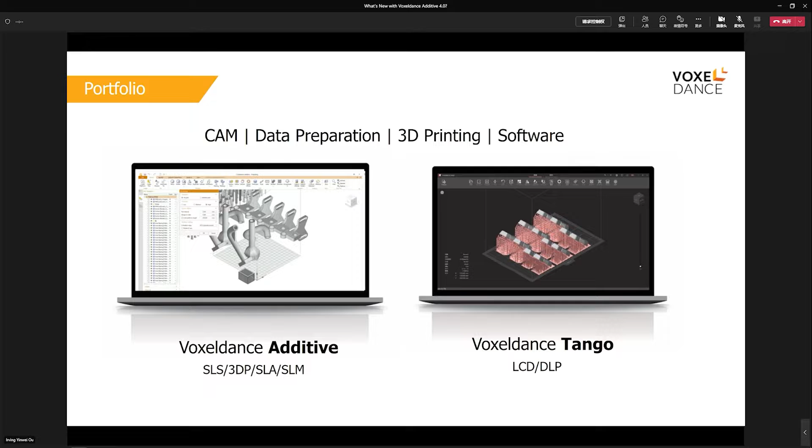They both are data preparation software. Someone may call it CAM or slicer. I understand lots of our attendees today are experts in this industry, but still a little bit of explanation on the concept of CAM: the CAM acts as a bridge between the files of 3D design and the actual printer.

So you cannot simply take an STL file to the printer and immediately print it out. It requires a series of editing beforehand to the original file until it can be 3D printed. This is what our software does.

A professional software can influence the final print in terms of success rate, material consumption, printing quality, whether it's easy to post-process or not. There are only so many options on the market, including Voxeldance and maybe one or two others. You know their names, right?

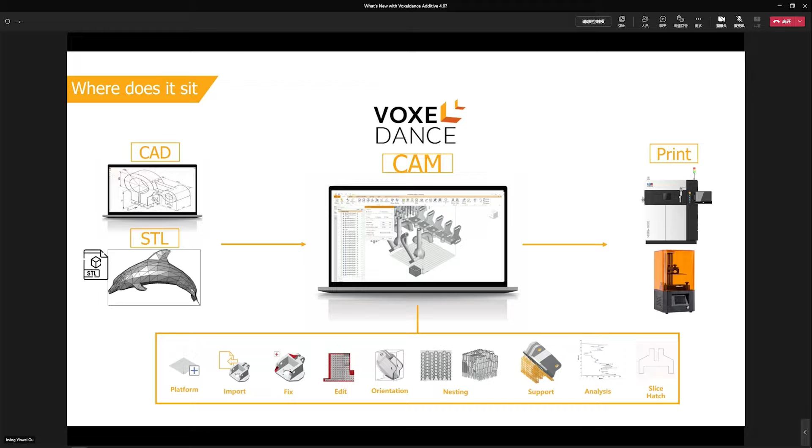And I'm glad we seem to be doing great so far in getting rapid growth of the market share year over year. But again, this is what our product does: to prepare the data of oftentimes complicated and challenging models so it becomes ready for printing.

Now, here in this slide is an overview of the workflow, or the collections of functions available on the Voxeldance Additive: create platform, import STL or CAD file, model fixing, editing, orientation and nesting, and of course support generation, either automatically or manually, or mix and matching them, and lastly, analyze the model and slice it.

We also have an option which the OEM manufacturers might be very interested in, the hatching function. This is an optional module. We call it BP, the build processor, that can be purchased and integrated into the Voxeldance Additive. It basically prepares the slices with laser hatches so the printer, usually SLS and SLM printer, can read the file and start printing according to the laser lines suggested by Voxeldance.

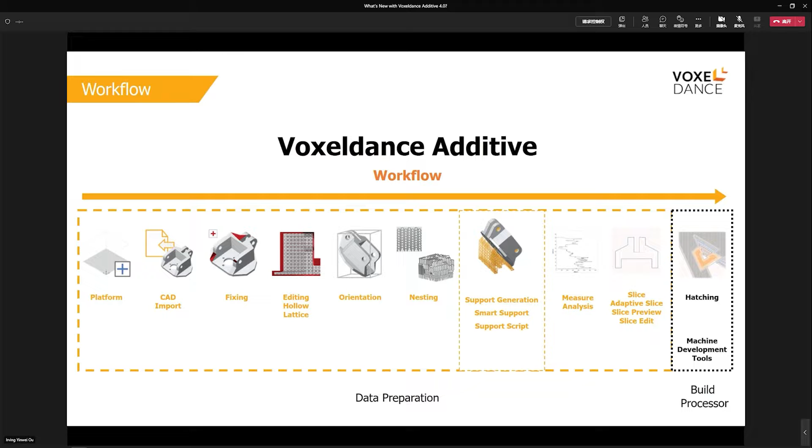It's kind of similar to the concept of G-code in the FDM world. So that's Voxeldance Additive, all about data preparation and an option for laser hatching.

Now, here we are, the topic for today: what's new in the latest Voxeldance Additive 4.0 release? First on this slide, a summary of all the key upgrades compared to last year's 3.0.

There are major upgrades on key features like shrink wrap, a highly efficient fixing tool, especially for service bureaus. 2.5 dimensional nesting is an evolvement from the traditional 2D arrangement, especially for dental preparation. We also added new types of support structure, such as tree support and web support, according to our users' feedbacks.

And also a major upgrade on the build processor that gives granular settings for our OEM manufacturer partners. The R&D team also put great effort into improving the algorithm, which you may not find on the toolbar, but as a result, increased the overall performance and of course, less crashes and issues. I'll walk you through these new features one by one in the next few slides.

First of all, UI and UX. It's all about user experience. I know it may look trivial to you, but it also shows the fact that our users have been frequently using the product and they start to expect the workflow to become more simple now. Especially the 3D printing factory or the service bureaus. They gave us great suggestions on features that could make their life easier during daily printing works.

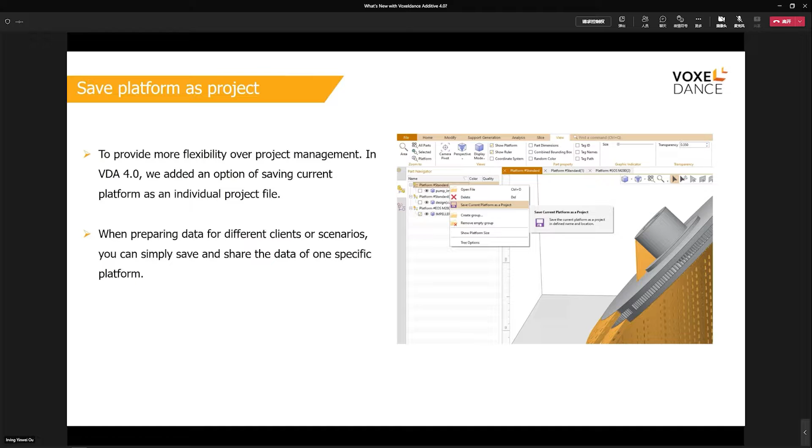In previous versions of Voxeldance Additive, you can save your job as project, but it only allows you to save them all. In Voxeldance Additive 4.0, you can work on multiple platforms, each with different sets of models, and then save, export, or print individually. The concept is somewhat like artboard or worksheet in other softwares. In real life, a service bureau may have different orders coming with different sets of models to be printed. In such case, this improvement can help them better organize the jobs and speed up the process.

Here's another improvement on the daily routine of users from service bureaus. The user can quickly switch between a list of parts to be edited, like support generation, labeling, etc. All the keyboard shortcuts are customizable in Voxeldance Additive.

Some of our users require improvements on the camera rotation. Sometimes when they rotate, because the center of the camera is in fact the center of the screen instead of the model they've been working on, the camera went crazy all over the place. And from Voxeldance Additive 4.0, you can define your camera rotation center whenever needed by holding down the right button of your mouse, and then the position of the cursor will become a temporary rotation center. So it's kind of handy.

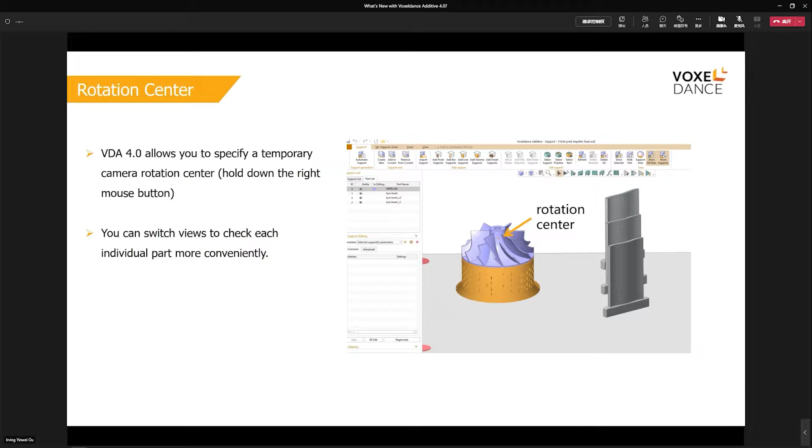So here's the end of UI UX. In the next few slides, we will start to cover more technical improvements. First is the feature that we use to edit the models. Surface to solid. This feature can add a certain offset to a surface. You can make it thicker in both directions or only one direction.

Sometimes you might have to work with just surfaces. Instead of going back to the original CAD design, you can use this tool to create a printable solid out of an existing surface. Or sometimes you want to use Boolean operation that involves a surface and a solid. In this case, you may want to make the surface thicker to avoid errors after the Boolean.

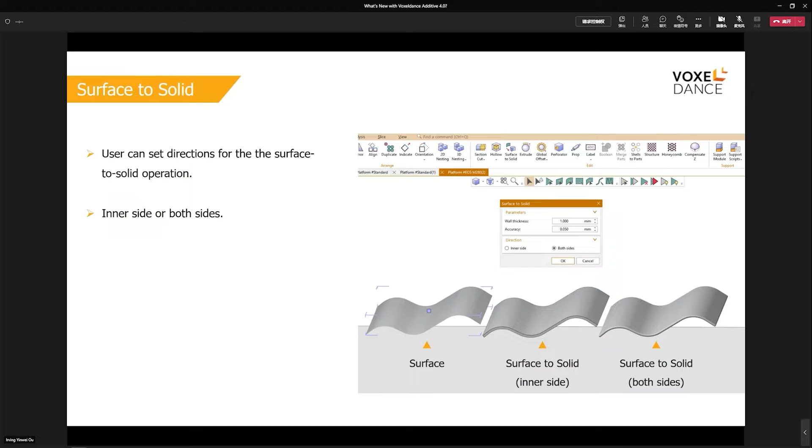Shrink wrap is another major new feature in 4.0, which I know is going to be frequently used. Basically what it does is wrap a layer, oftentimes a very thin layer, around the original model. As you know, in real life, some models are a total mess that are almost impossible to fix. Imagine a car model, like on this page, or an architectural model with tons of errors. Shrink wrap is an easy way out. It covers a surface around your model and shrinks around it, like a plastic wrap you use in the kitchen. The errors are also gone.

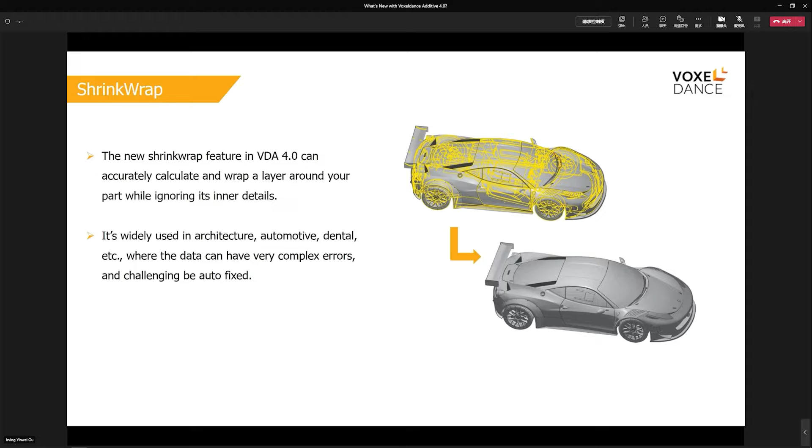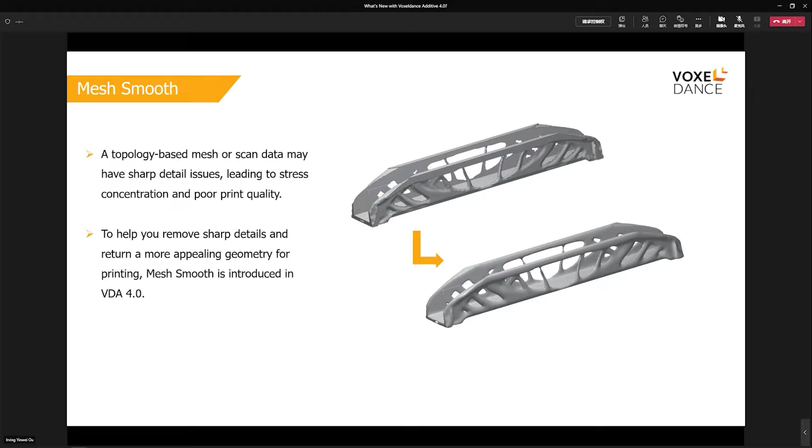Mesh smooth is another useful feature. Some people refer to it as denoising, filtering, or fairing. Data in the additive manufacturing world may have noisy mesh. A typical example is scan data. As the name suggests, you can filter out the noise on the input data and make the mesh smooth. For shrink wrap and mesh smooth, we will show you how they work in the demo session.

Next is arrange, or you may call it nesting. Voxeldance Additive has 2D and 3D nesting. We made a series of improvements on the nesting algorithm. This is one example. Unlike previous versions, in 4.0, when you do 2D nesting, the software will consider not only the outer shape but also the inner shape of the models on the platform, especially the ring-shaped models. The space inside the ring will also be used for nesting, as long as the models can fit in.

2.5D nesting is an enhanced 2D nesting. So not only does it arrange the models on the platform and spread them out in the 2D dimension, it also considers the z-axis to see if there's any chance they can get even closer.

The dental RPD is a typical use case where all the RPDs shaped alike but with curved walls can be arranged more tightly. So imagine how you arrange the dishes and bowls in the dishwasher in your kitchen. If looking from a top angle, these models are colliding into each other, but if peeking from the side, these tilted RPDs are not touching each other at all.

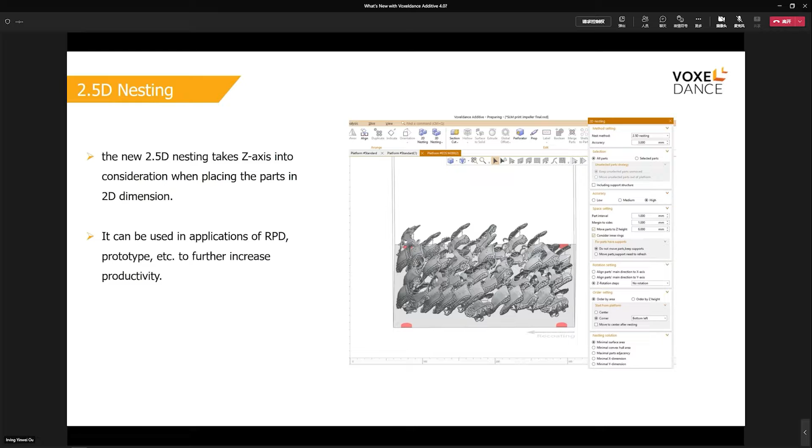Next is probably the biggest feature set in any data preparation software, which is the support generation. Let's begin with the two new support types. First is tree support. It's essentially a variation of the existing bar support. It works great in dental and jewelry applications, for example, and it saves materials. You will see more details in the demo session.

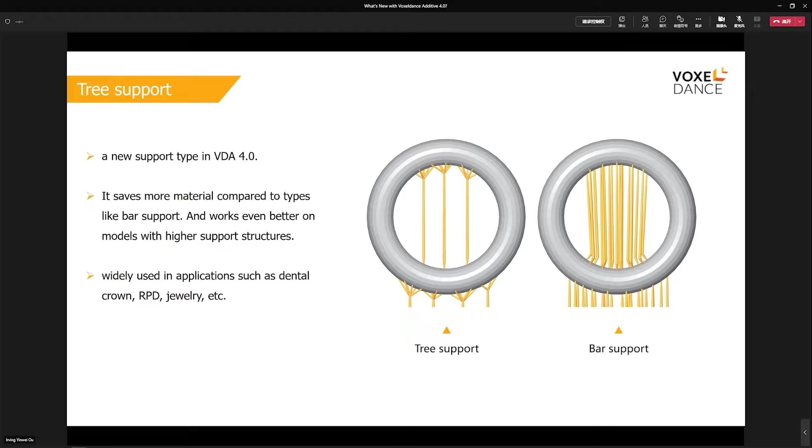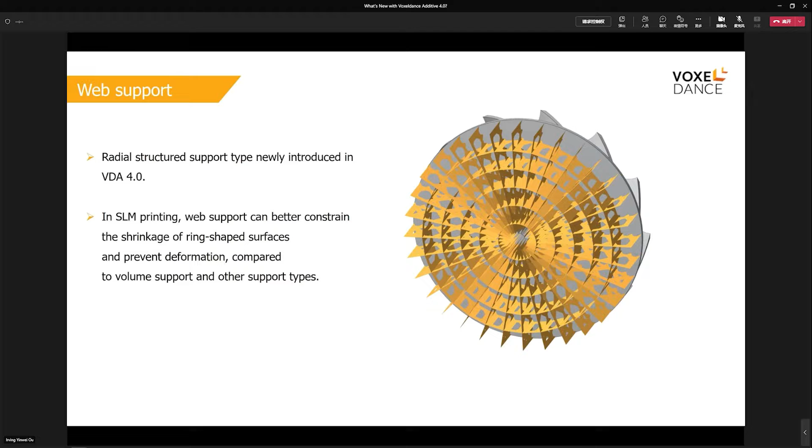Next new support type is web support. It works great with ring-shaped models. These models don't necessarily have to be a perfect ring. As long as there's a surface with a hole in the center, the radial structure of web support can deal with the shrinkage of such a shape very well. You will see the demo as well.

And here's border reinforcement. It is a new feature inside the volume support settings. In metal printing, and in fact also SLM, the volume support works great with larger parts. However, it tends to crack at the edges that connect to the base. Border reinforcement will add something like a chamfer on the edge that can hold the part steady with stronger support.

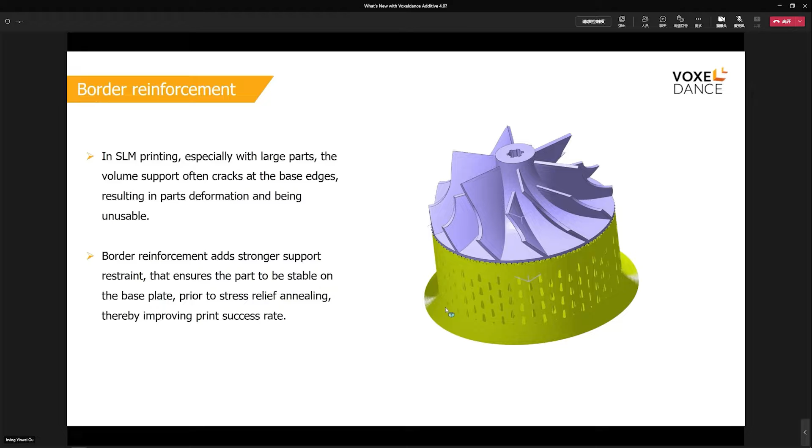And lowest point or lowest line support. This has been one of the key features of Voxeldance Additive for years. Not only will they hold the model in its position like a support, in metal printing scenarios, lowest point or lowest line supports are very important as they can transmit the heat from the model to the base to avoid deformation. So in 4.0, we give more support types that you can choose from to become the lowest support, including cross support, bar support, and smart support.

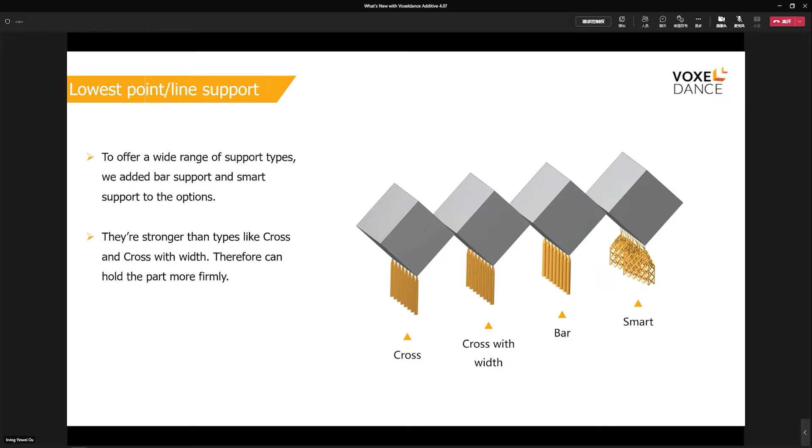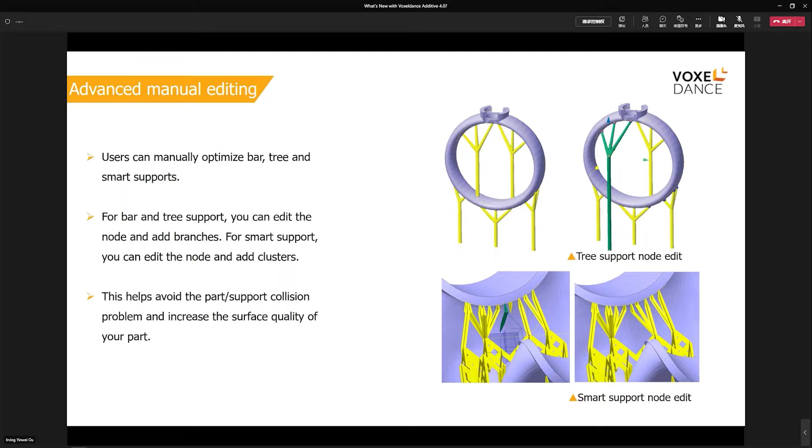In Voxeldance Additive, we also allow users to modify the generated supports. In 4.0, we give even more freedom to our users. For example, you can drag and drop the support structure to avoid the bottom tip growing on the surface of the model. You can also edit the tip of the tree support or smart support. You will see the demo in a minute.

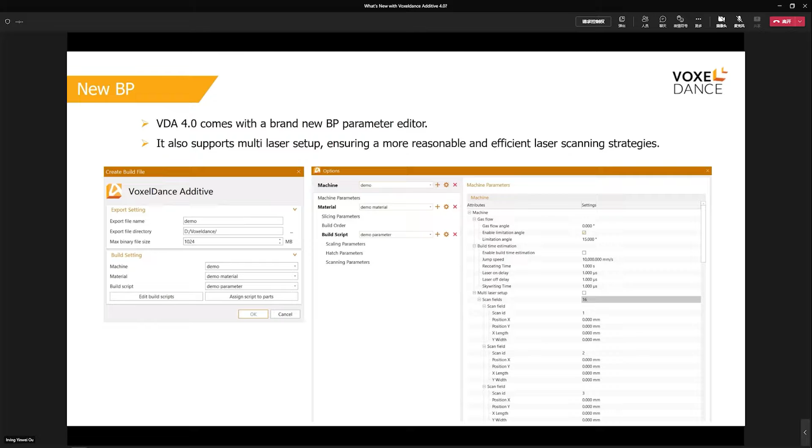Last but not least, slice and hatching. This is more of an OEM manufacturer-oriented function, so I'll fast forward. First of all, we completely redesigned the build processor in VDA 4.0. It now supports multi-laser and a wide range of new granular settings. Talking about granular settings, you can apply different settings to areas like downskin, inskin, and upskin. They are displayed in different colors in slice view mode. The blocked path is essentially an improved way of running the laser in thin walls.

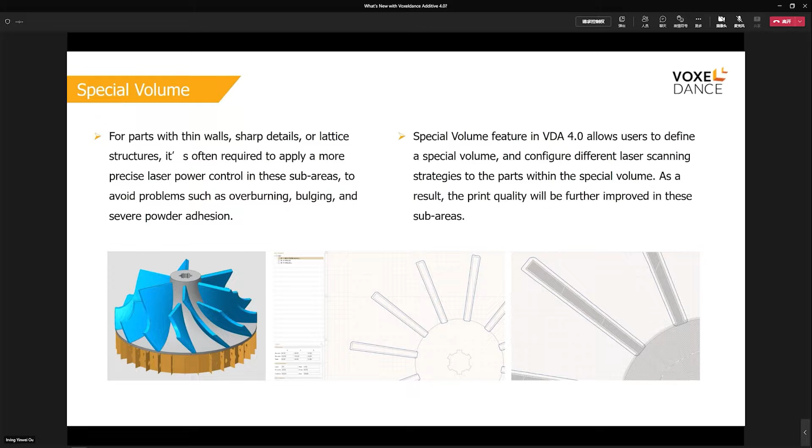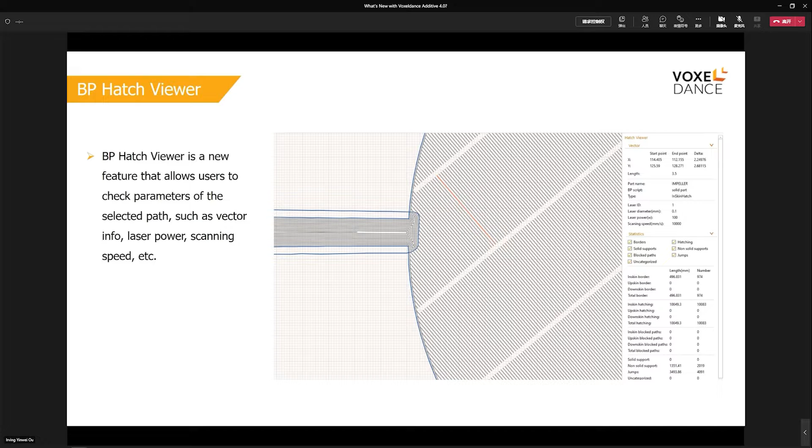Voxeldance Additive has had a slice viewer with which users can easily check the hatching details. In 4.0, we provide a dedicated function, BP Hatch Viewer, so you can quickly access more key information from one page. I'll demonstrate both Special Volume and Hatch Viewer in the demo. Okay, so this is the end of the presentation. Take a deep breath and I'll move on to the demo session.

Now, here's the first demo for the new feature called Shrink Wrap. Let's first import a file, which is a dental crown. Now here's a tip. You may want to always display the part border. With this option turned on, it's easy to locate errors such as bad edges or intersections with your bare eyes. They are always displayed in yellow or red on the model.

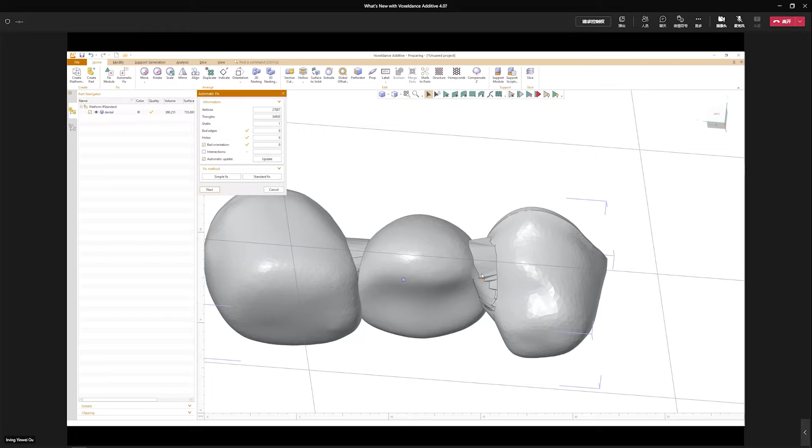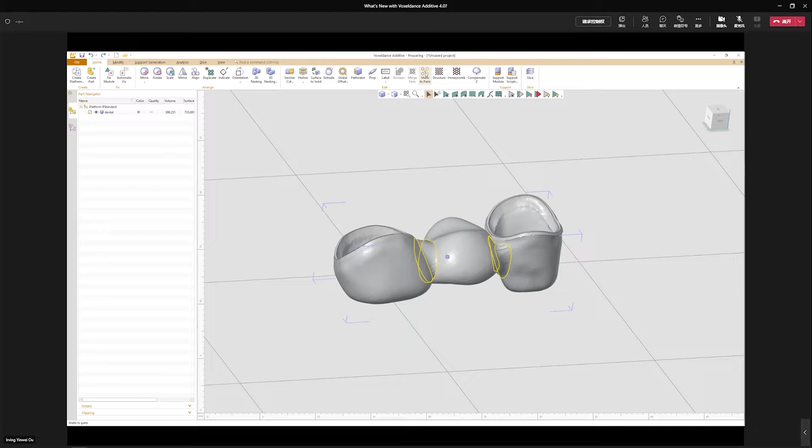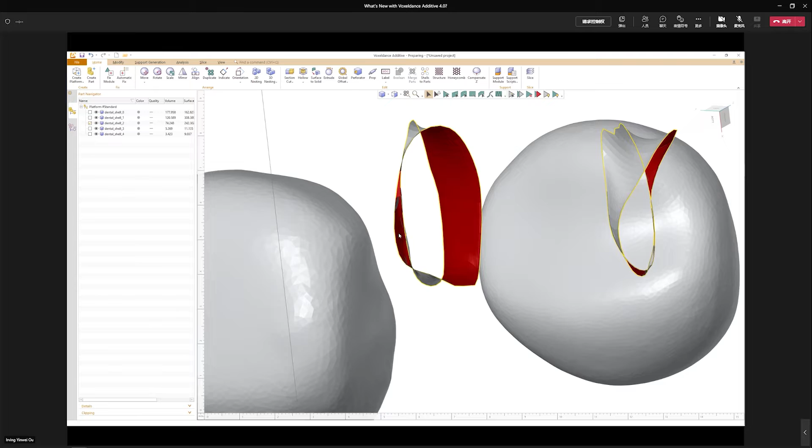Let's first convert the shell to parts. You can now see the 3 teeth independently and they all look fine. But the surfaces that connected these 3 teeth obviously have some tricky errors. It's twisted almost like a Mobius ring. That's why it's super challenging for any software to identify plus autofix such errors.

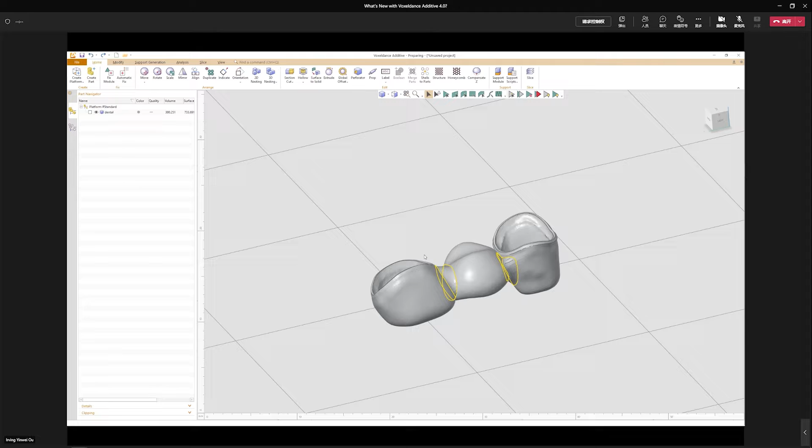Also, for those familiar with CAD design software, you should understand that if you simply sweep the spline, you will likely get awkward results, right? Now, one of the best solutions to such a scenario is to use the shrink wrap function, and it's available in the latest Voxeldance Additive 4.0. Let's set both the tolerance and the thickness to their minimum values. Click OK, and the shrink wrap is done.

Well, sometimes you may still find errors like this, which are in fact sharp triangles. You can simply go ahead fixing them by deleting sharp triangles. Now the file looks smooth and clean. It is properly fixed.

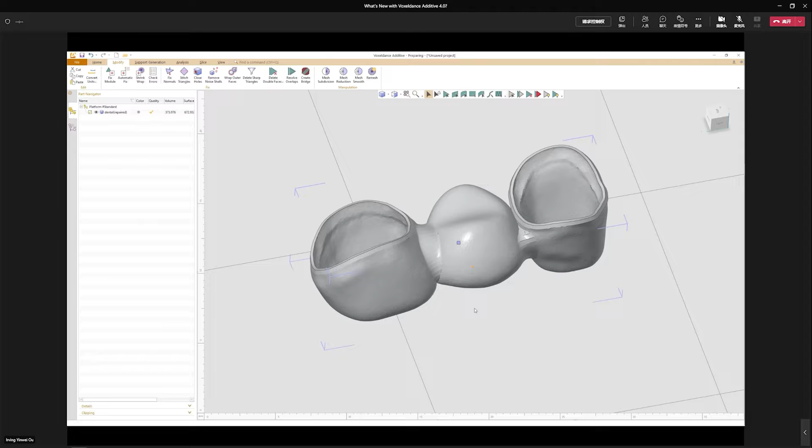Next, we need to add support to it. Voxeldance Additive offers a wide range of support generation and editing tools. You can add support automatically, manually, or mix-match both ways. Next, I'll do the manual support generation only for demo purposes. Let's enter the support module. First, preview the support area. You can hide this pop-up window if it's annoying.

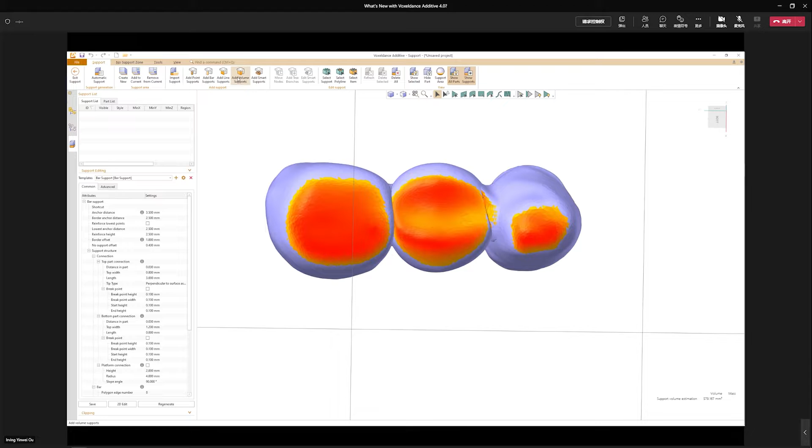We have customized a volume support template before this demo. Let's select it and set as default. Now, whenever you want to add volume support manually, this specific volume support template will always come into play and be ready to be added. Now, you can start painting. Use the mouse to mark the outer contour of the tools by adding anchor points, and apply. You will now get a volume support on the areas just painted.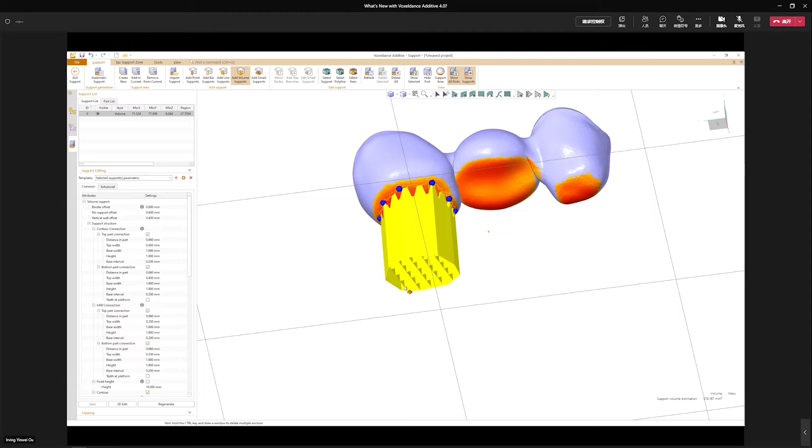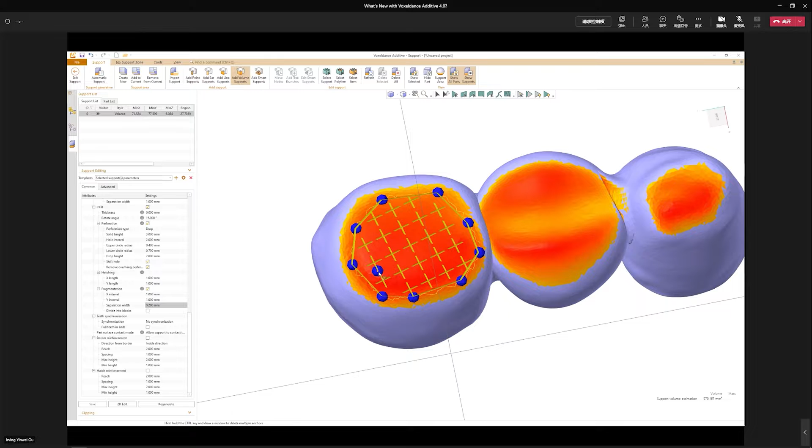You may want to use the volume support for this model because the shrinkage stress of dental crowns is usually larger than RPDs. But there's room to improve the support for easier printing and post-processing. We will change the value of the fragmentation here to split the support structure into shapes like crosses, which also looks a little bit like point support. If you turn the model transparent, you will find the support structure looks like crosses but split open.

I'll illustrate with current parameters what it will look like after slicing. The support structure will become 4 lines or vectors in 2D slices. In Voxeldance Additive 4.0, you can select teeth intersections to further improve it. Now, you will find the support structure becomes crosses, and therefore, in each slice, it becomes 2 vectors crossing each other.

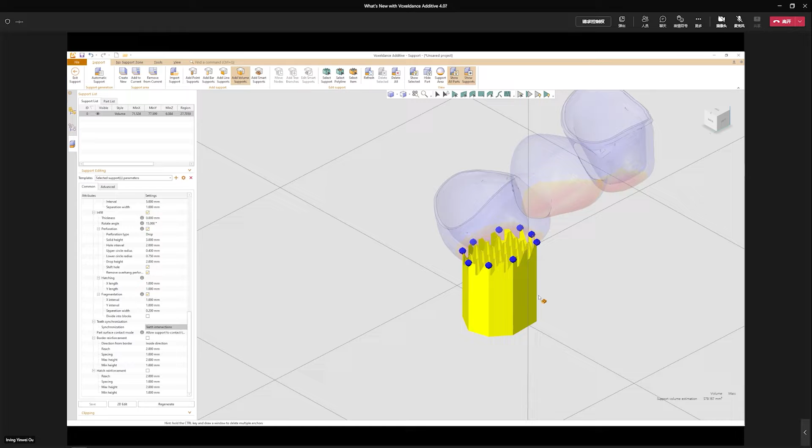By decreasing 4 to 2 vectors, it significantly improves the productivity with simplified laser scanning. But please remember, it's always recommended to test the support before massive printing whenever you make such changes to the support parameters. Now that's it for the first demo.

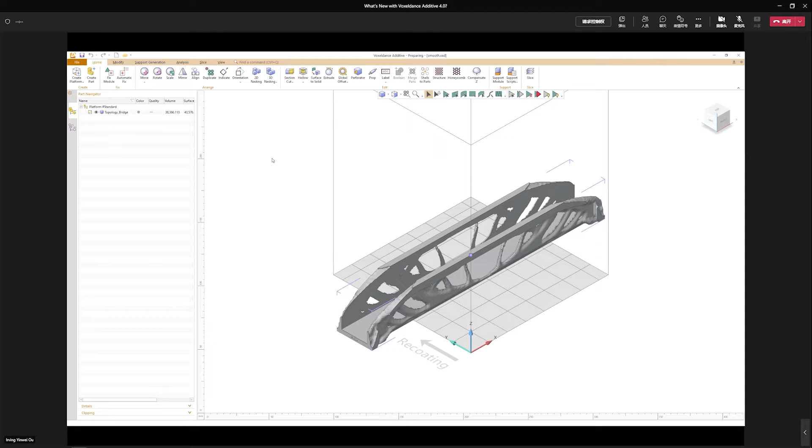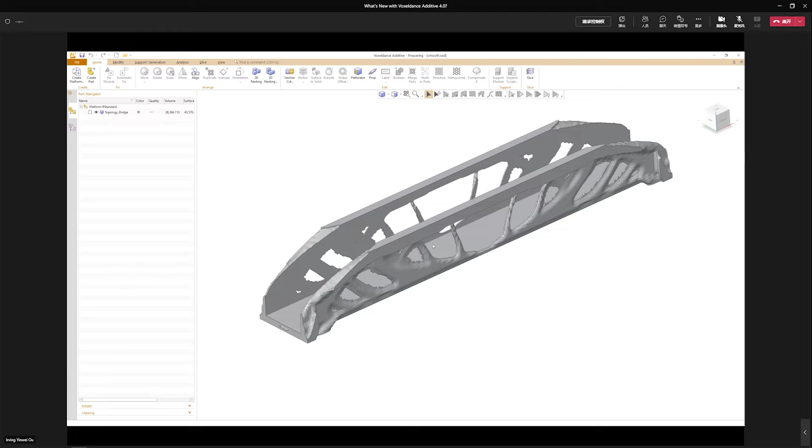Next, I'll demonstrate the Mesh Smooth function in Voxeldance Additive 4.0. Here is a bridge-structured model. Let's hide the platform first. You may notice this model is a result after topology optimization. For those who aren't familiar with TO, topology optimization is a mathematical method that optimizes material layout within a given design space for a given set of loads, boundary conditions, and constraints with the goal of maximizing performance of the system. And it uses a finite element method, aka FEM, to evaluate the design performance.

And this model itself is the result after topology optimization. From Voxeldance Additive 4.0, there's a new feature called Mesh Smooth in the Modify module. Select the model, click Mesh Smooth, and keep the value of the strength to 1. Click Apply, and you will find the model becomes smoother now. For such a model, in this case, we want to do the Mesh Smooth 3 times.

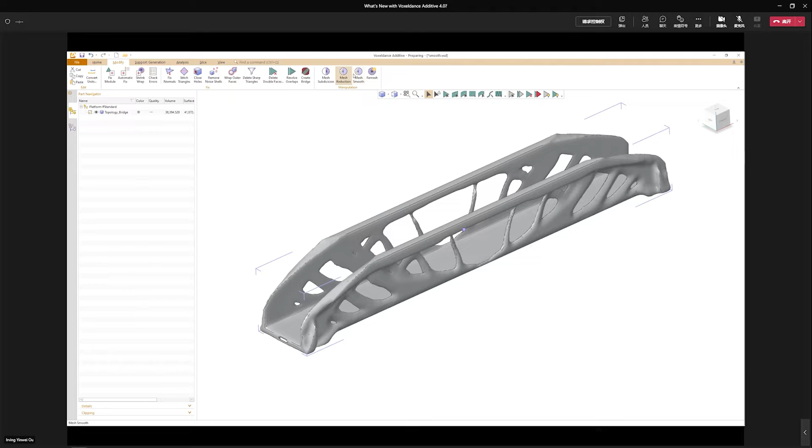Now it's nearly done. Like in the first demo, there might still remain some tiny little errors like these cracked lines on the model. Let's use shrink wrap to improve it. Set tolerance to 0.1 and thickness to 0.25. Then click OK. It will take some more minutes.

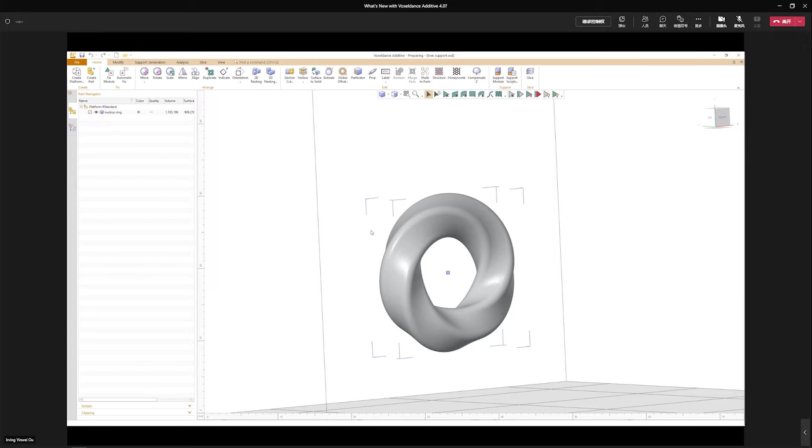While we are waiting, I'll move on to the third demo on the tree support. Let me import a new file and show you how it works on jewelry, in this case, a ring. To add support automatically, we usually do this by running a support script, like this. Here's the result of an automatic tree support script. But once again, I'll show you how to add tree support manually for demo purposes. Let's enter the support module and remove the previous support first.

Click support area, and the hot zones are the ones with critical angles larger than 45. Click Add Bar Supports. Scroll down on the left and you will find a new set of parameters called Branch in the bar support template. If you set it to any value larger than 1, the bar support will become a tree support.

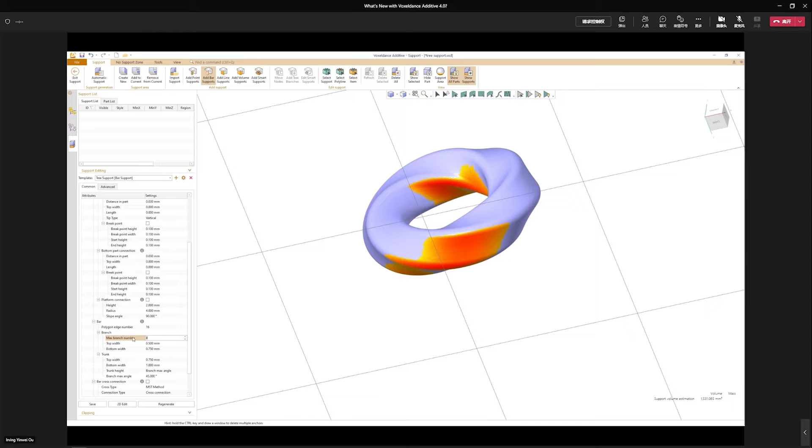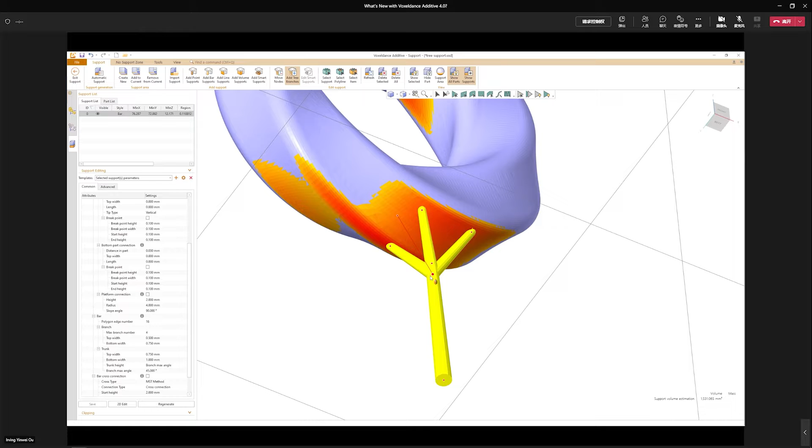Now, click on the surface of the model to add anchor points, and you'll eventually form a tree support on the model. You can also add more branches. First, click Add Tree Branches. Then click on the surface of the model, then find a place on the trunk of the support to complete

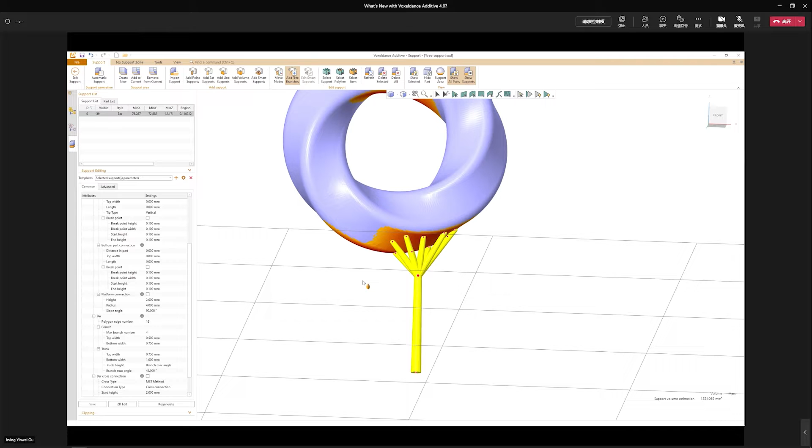this job. Also, if you hold the Shift button and then click on the surface of the model, you can quickly add more branches. In this case, you don't need to specifically find the anchor point on the trunk. The software will automatically decide the point on the trunk of the support for you. Now, what if I want to add support to the inner ring? Let's repeat the steps, and here's the result.

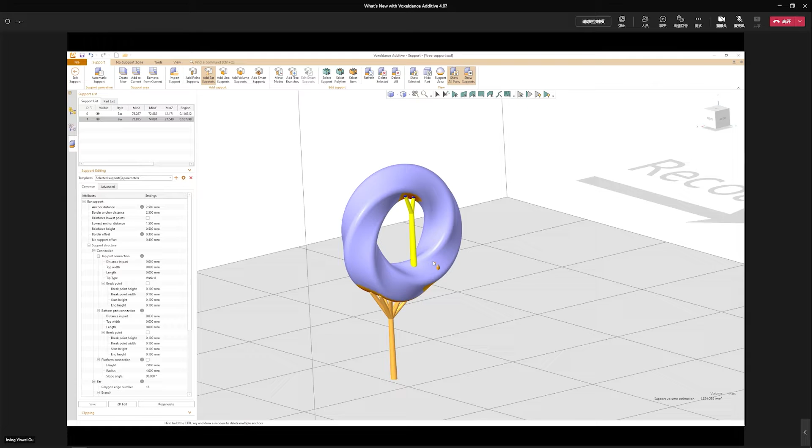Now I know you may not want the bottom of the support to ever touch the model because it's really unfriendly for post-processing. In this case, you can move the anchor point. Select the support. A gizmo will show up. Hold the Shift button, drag and drop the XY plane. The support will be moved and grow on the bottom of the platform instead of the bottom of the inner

ring. Also, the angle looks awkward here. We can also drag and turn it into a better angle. That's it for a quick demo on the tree support. Let's save and exit.

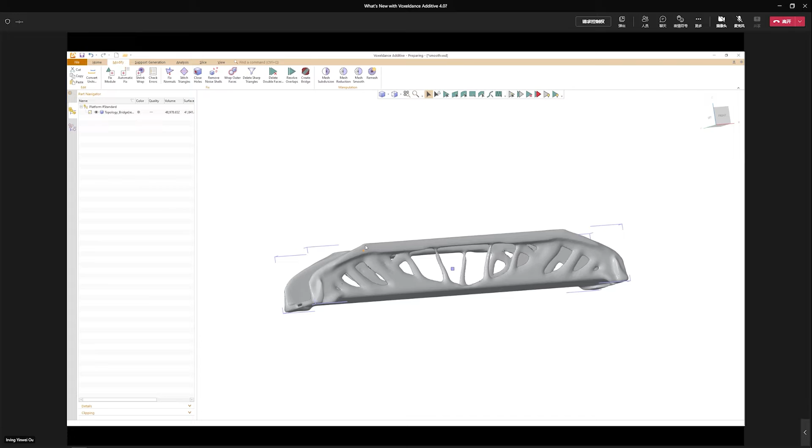Now, back to the previous window. The shrink wrap on the bridge structure is done. With the 0.25mm thickness added, I guess you can tell the difference if I undo and redo. See how the two lines here, they disappear after shrink wrap. So here's the end of the two demos of Mesh Smooth and Tree Support.

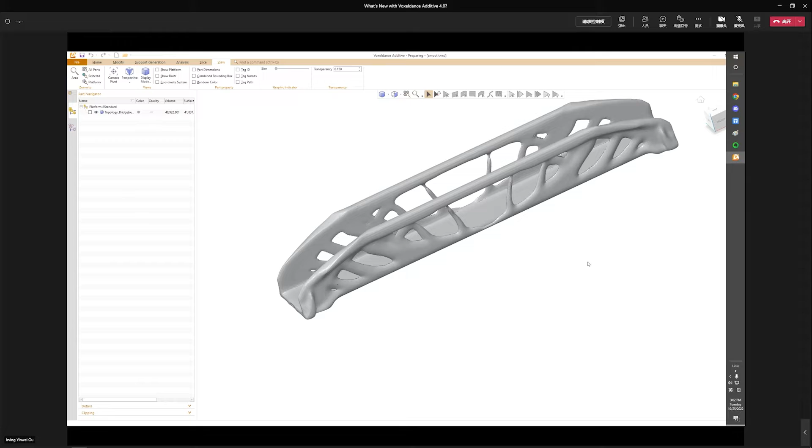And we are halfway through. And here's the last part of the demo. It will be done on this model, which is a pump impeller. I guess you may have found it in our 4.0 newsletter or banner on the website. We will be doing a number of preparation works on it, such as orientation and support generation with the latest 4.0. Let's first check the dimension.

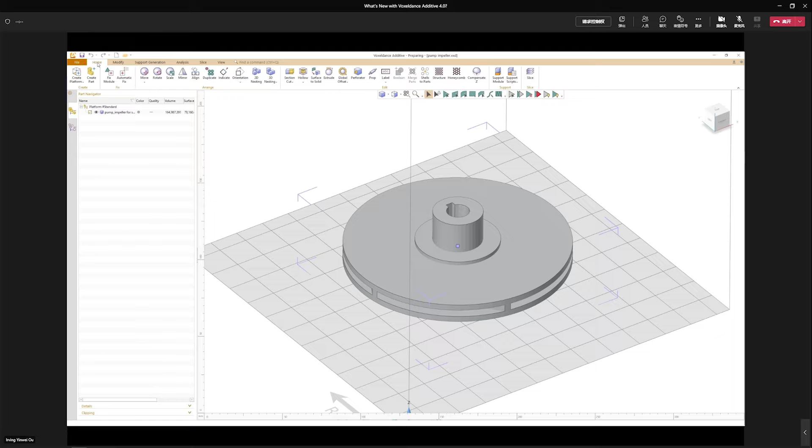The diameter of the impeller is 147. As you can see on this impeller, we got two plates in parallel, which is obviously challenging for 3D printing. So we will have to do something until it becomes easy to print. First, let me rotate by 45 degrees and lift up a little bit. We all know that generally speaking, 45 degrees is the critical angle for most SLM prints.

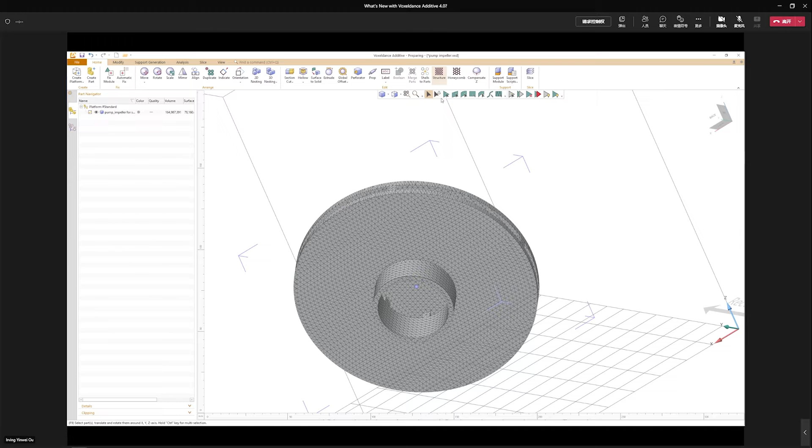Next step, I'll offset the model by a little, which can be cut off during the post-processing by CNC machining. Let me first mark the side of the outer ring. Use local offset and add triangles by 2.5mm. Click Apply and it has grown outwards by 2.5mm.

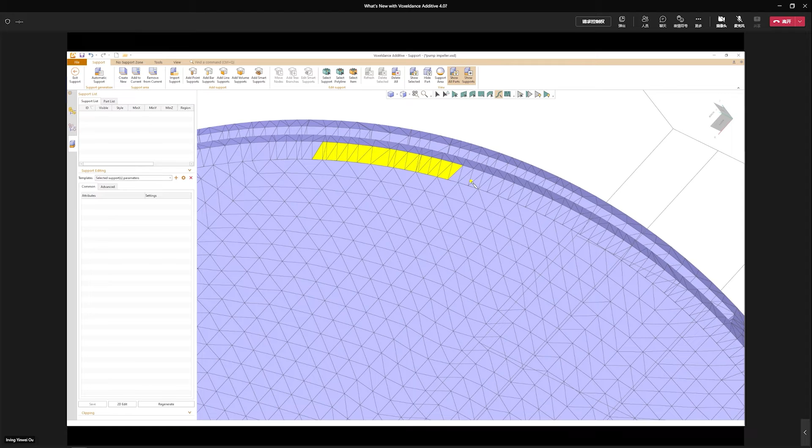Next, let's enter the support module, and I'll demonstrate real quick how to grow a tree support. First, I'll generate tree support on the edge of this model. Let me first mark the edge of the surface. Well, since it takes some time, I will load a new project of the exact same model, but I've already marked the edge and saved it as a support area.

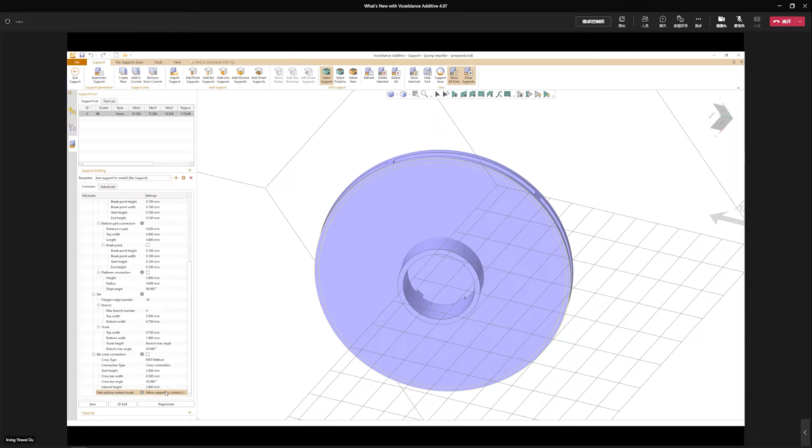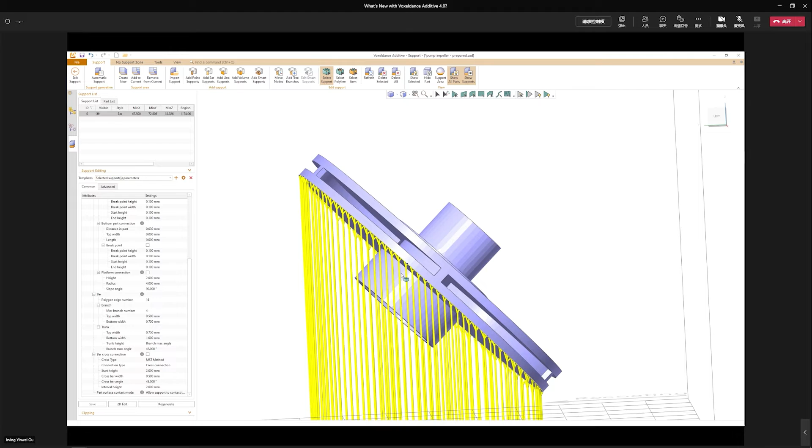Then apply a support script of tree support to this support area. And it's automatically generated. Because this model was rotated by 45 degrees, the supports are lower on this side and higher on the other side. Higher supports tend to be unstable, so you may want to strengthen the support structure by adding cross connections between the bars.

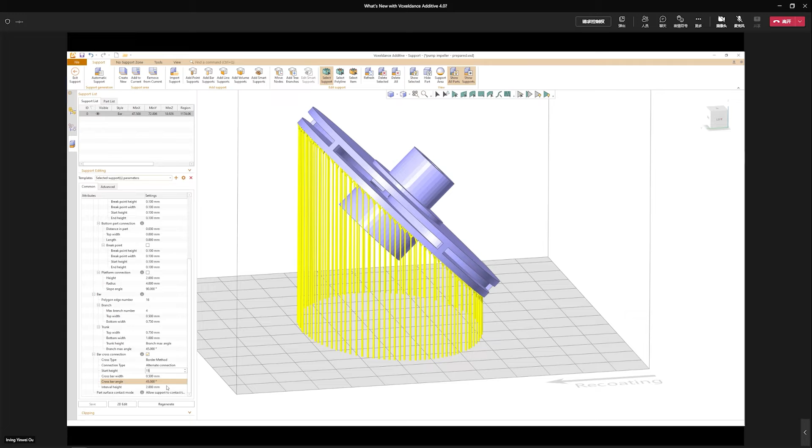Enable bar cross connection, set cross type as border method and connection type as alternate. Also, we probably don't need to worry about the lower height, so we can set this value to 15, for example, and click Generate. Now you can see the connections are added and they aren't growing lower than 15mm. That's it for the tree support on the edge.

And I'll move on to add volume support to the rest of this model to allow heat transmission and avoid deformation. First, mark the surface, find a pre-configured volume support script and change the parameters a little bit. We will do a border reinforcement. The direction is outwards. Change the values of reach, max height, and spacing.

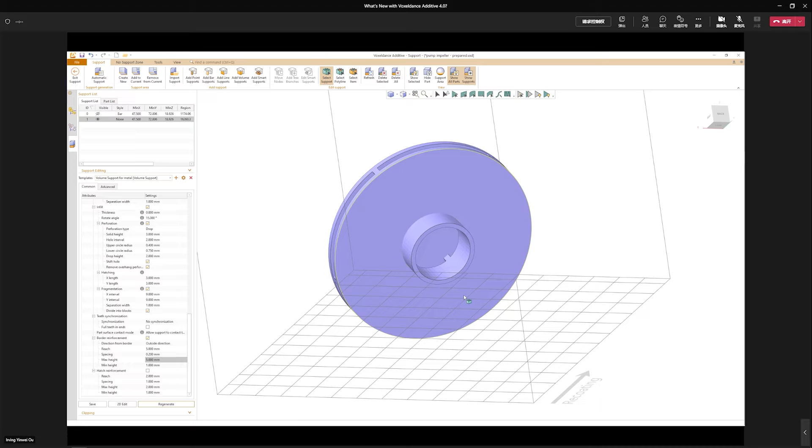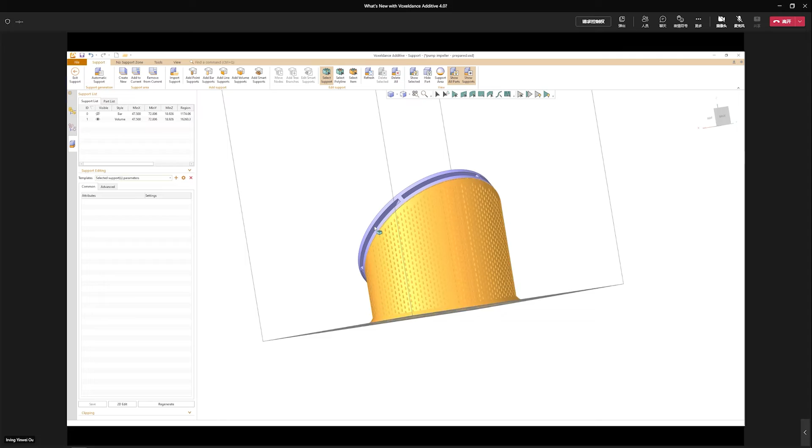And the volume support is generated. And this is the result of border reinforcement, and also the end of the work on this model. I'll start another demo with this smaller impeller. Again, I'll explain a little bit before the demo.

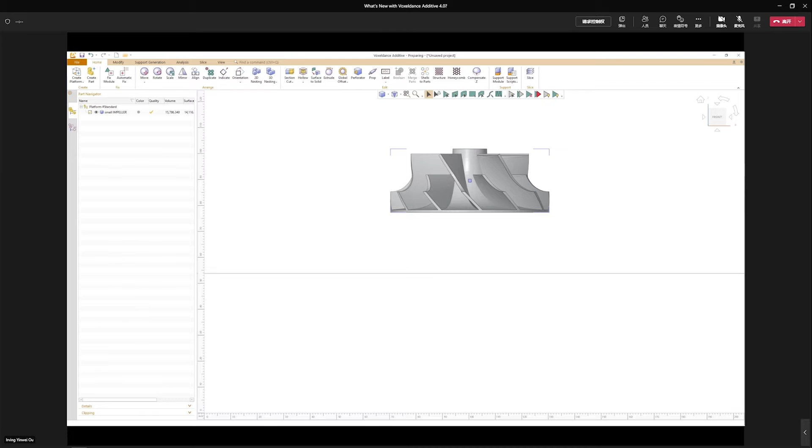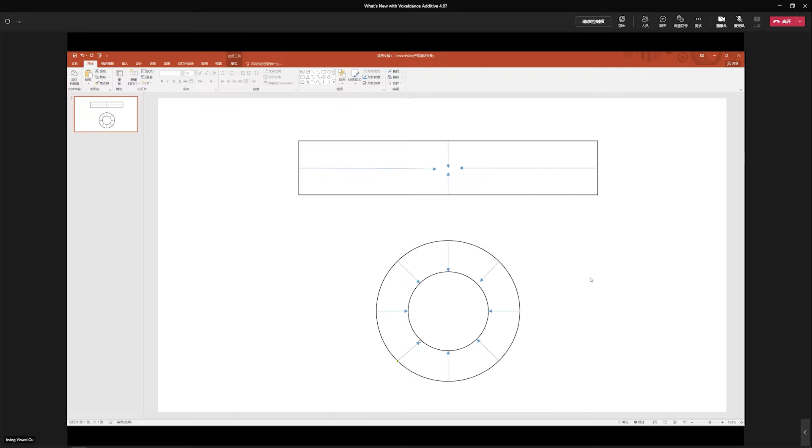This impeller is essentially a ring-shaped model. The point is, when you print something long like a box or cylinder, the shrinkage stress will likely go this way, and the longer side has bigger shrinkage stress. A warpage is more likely to happen, while if it's a ring, the shrinkage stress would be like a spider web. Therefore, a web support is ideal for a ring-shaped model.

Now back to the VDA. Select Support Module, mark the surface, create a support area, and apply web support. The support looks just like a spider web, distributed outwards from the center.

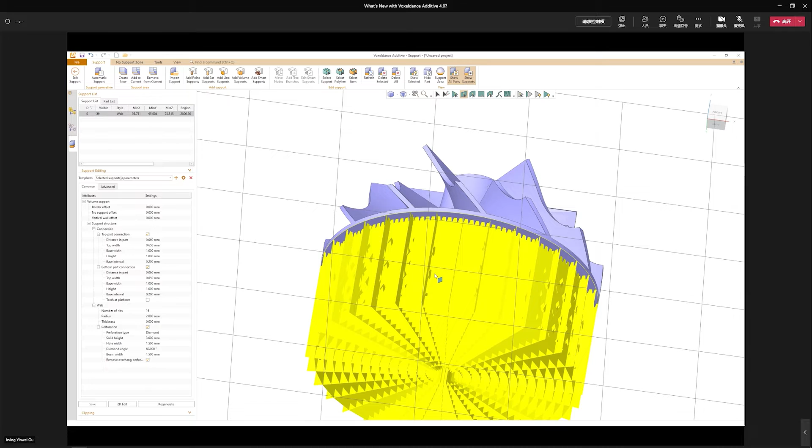And I think we also need some supports on the edge. Now the tricky part is the model has no edge that I can easily mark. In this case, we can copy the previous support area and do it by adding volume support.

Let's change the parameters first. I'll reinforce the contour by increasing the thickness to 0.2. The purpose of this volume support is only the contour. Therefore, we don't need infill. And a final touch by enabling a border reinforcement. Done. Here's the volume support with only the contour.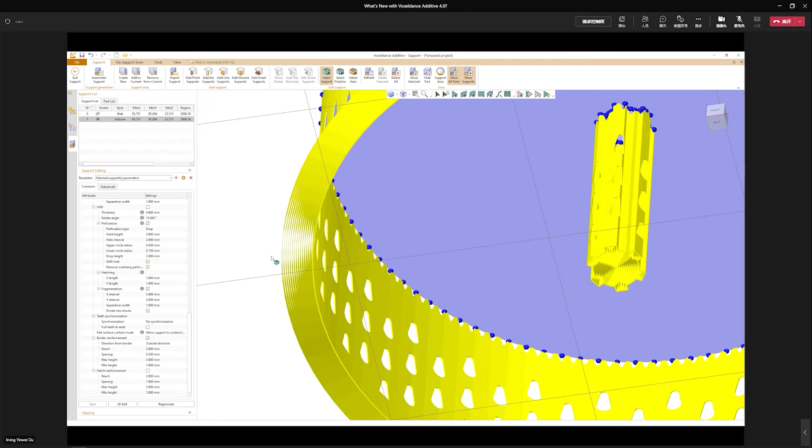Zoom in and you can see the contour has thickness. This is border reinforcement. It will add thickness. Not only the outer ring, this inner ring, though very small, also has border reinforcement.

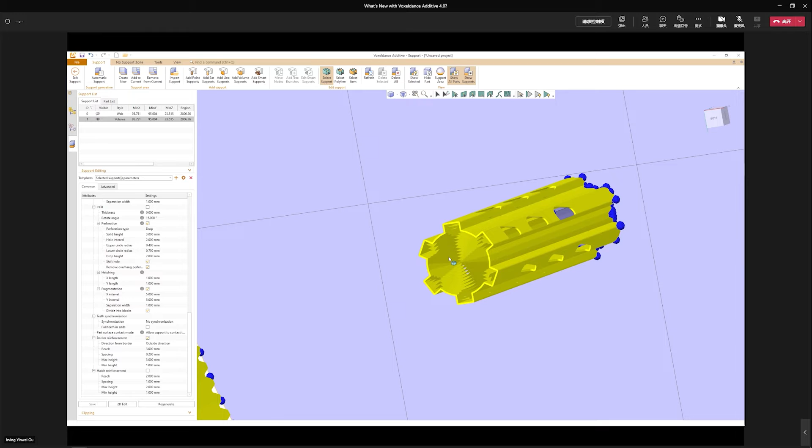We have some clients complaining that with some other software products, the thickened contour looks awful, as the mesh and triangles sometimes would mess up. But you can see it all looks neat and tidy with Voxeldance Additive 4.0. Now, let me unhide both the web support and the volume support. And that's the end of support generation on this small impeller.

Now we are at our last demo. I'll show you how to use the special volume. This is a new feature of Voxeldance Build Processor. In addition to the Voxeldance Additive, which is the data preparation software, we also have a product called Build Processor. It does laser hatching on each slice file and exports the hatch file for the printer to use.

If you and your client are OEM manufacturers, a little development is needed to let the printer understand our hatch file. Now in older versions, on one model, we only allow one build script for it. While in the next demo, I'll show you how to use special volume to apply different build scripts to different parts of the model.

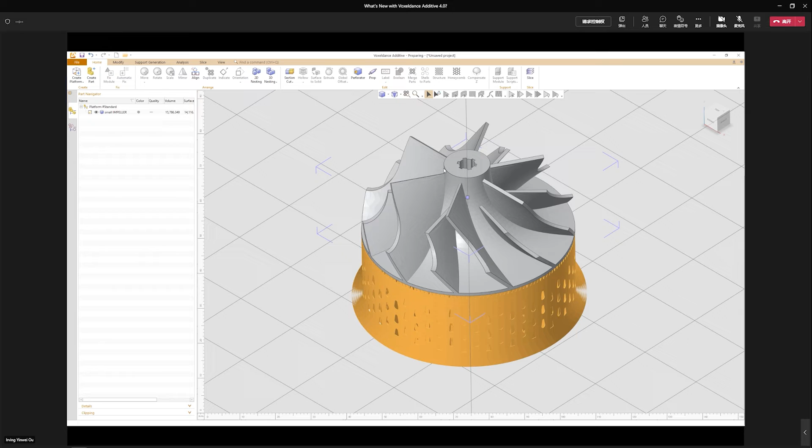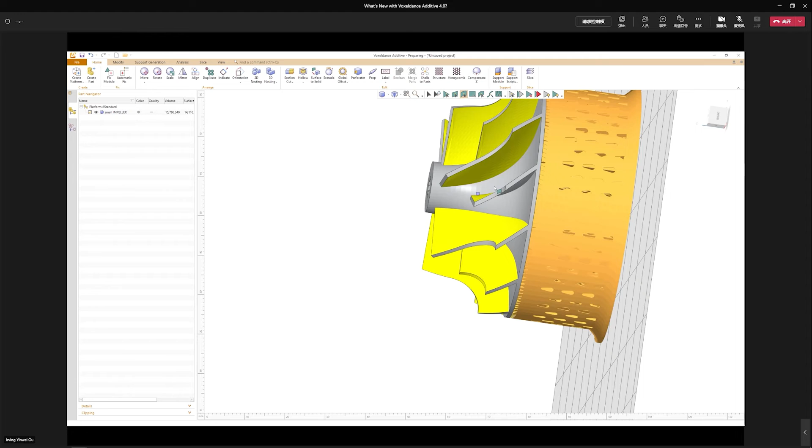First, like the logic behind support areas, you need to mark the special parts on the model. Make them the special build area. In this case, we call it special volume, and then apply certain build scripts to it. For this demo, I plan to do this to all the vanes on this impeller. Let's mark all the vanes.

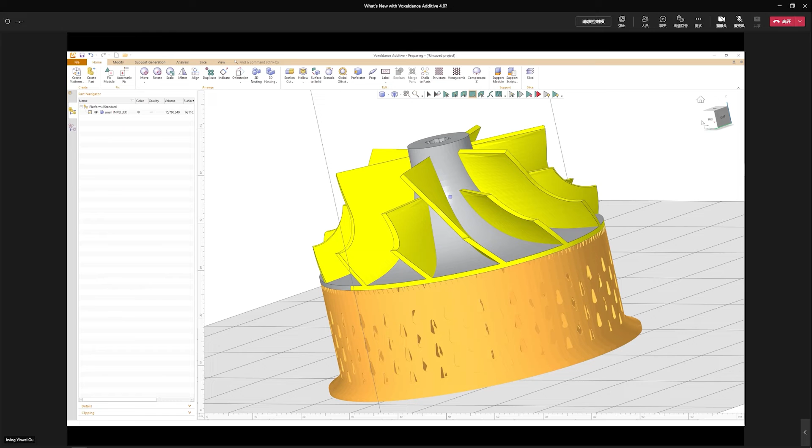When marking the vanes, the ring on the bottom will also be accidentally marked, which I don't want. Let me unmark this area. Hold Shift button, drag and unselect. Now I get the result of only the vanes being marked. Then I'll duplicate the marked triangles so I get a new set of identical vanes.

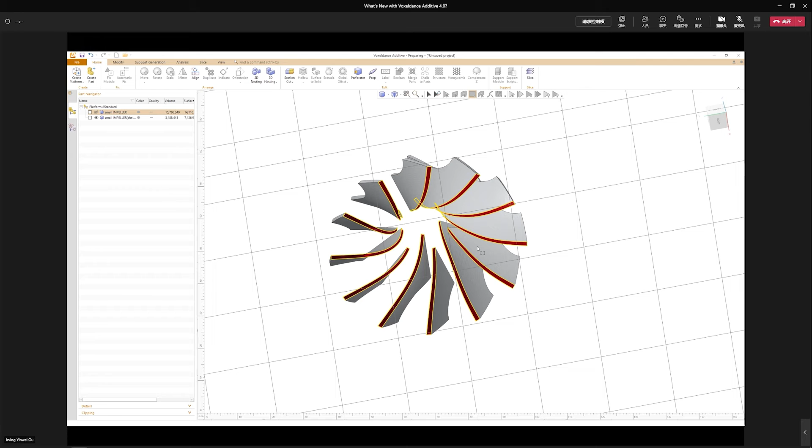Hide the original model. Now don't be confused. These duplicated vanes will later on be converted into special volume or special area. I will eventually apply a dedicated build script to this special volume, and that's the purpose of it. So the duplicated vanes will not become part of the model. Just wait and see.

Let us first fix these vanes. And add a little thickness with shrink wrap. Shrink wrap here is not for fixing, but to redesign the vanes to make the special volume slightly larger so it can cover all the actual vanes. Set tolerance to 0.1 and thickness to 0.25. Done.

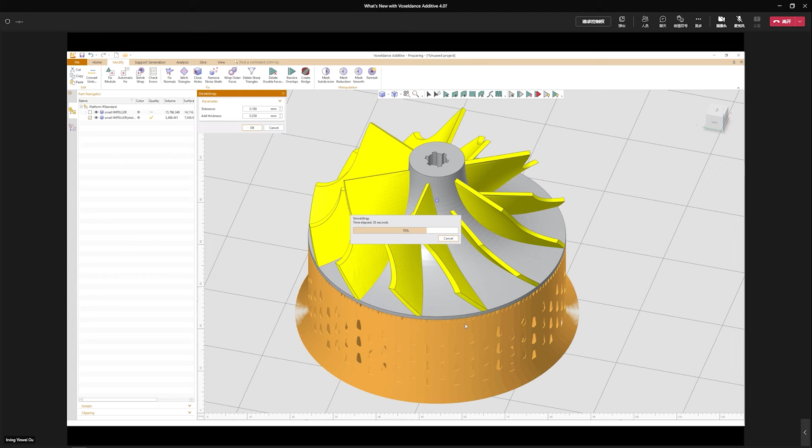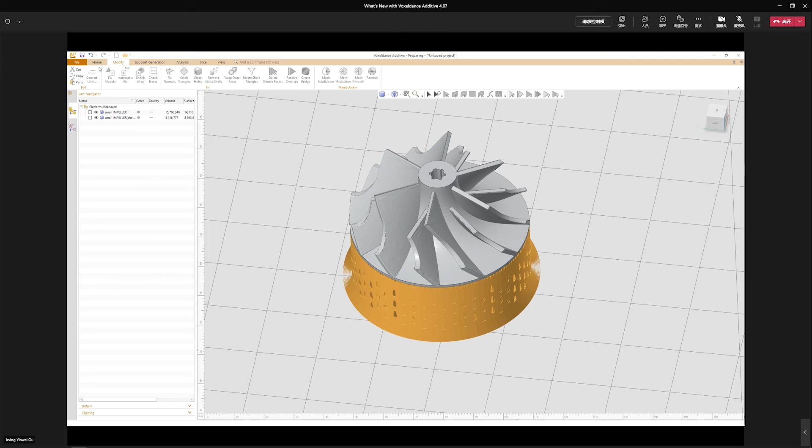You can see that after shrink wrap, the duplicated vanes look larger than their original ones. Just remember, we did it on purpose. Now we can configure a new build script to areas that are covered by these slightly larger duplicated vanes. Select it from the list and enter Slice module.

Now this is important. Set it as a special volume. Once done, a suffix called special volume will be added and the color changed to orange. So these duplicated vanes will only be a special volume, not an actual model. This is not printable. It only kicks in when the software needs to do laser hatching. It will apply a different build script to the parts covered by this special volume.

Select both items. Let's create build file. Choose the right machine and material, then take a look at the build script. We have calibrated a set of parameters that prove to be working nicely. There are two build scripts. One for solid part. The hatching style is set to stripe fill. And the other one for thin walls, which uses offset fill to do the hatching.

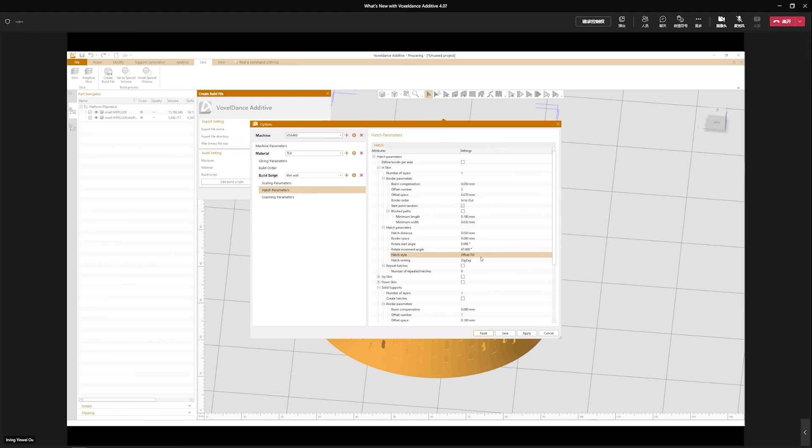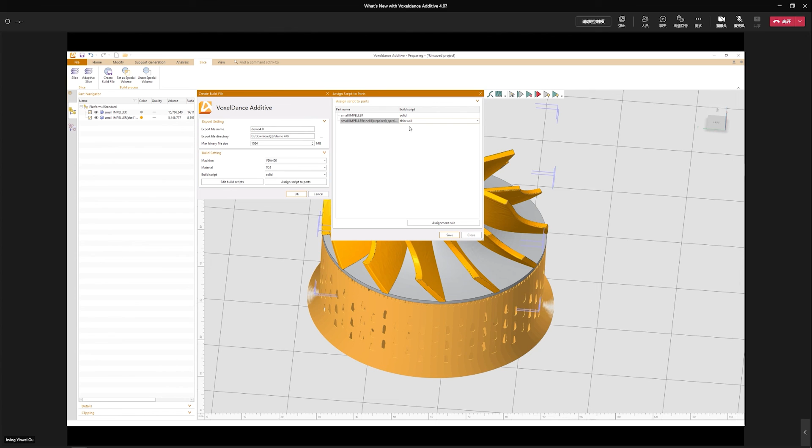Once parameters are edited and confirmed, I will assign them to the part. So for the majority part of the impeller, I will use solid. But for the special volume we just created, which is meant to be the vanes, I will use thin wall. Save and close, then OK.

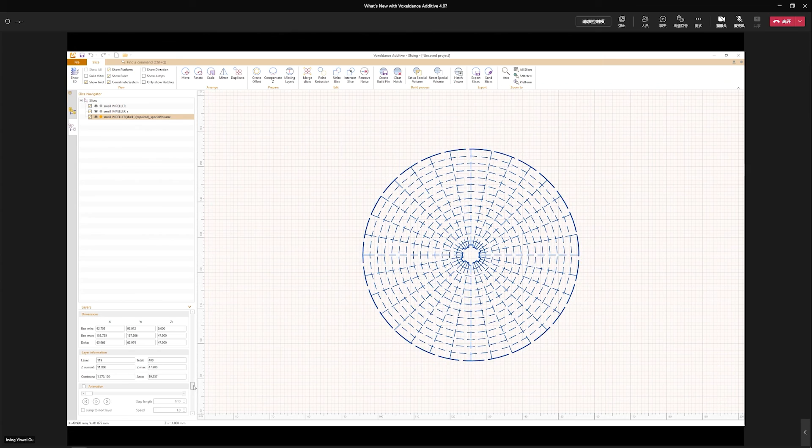Here are the slices with laser hatch. This is the first layer. Scroll up and down to preview each layer. Enable Show Directions to view the directions of laser.

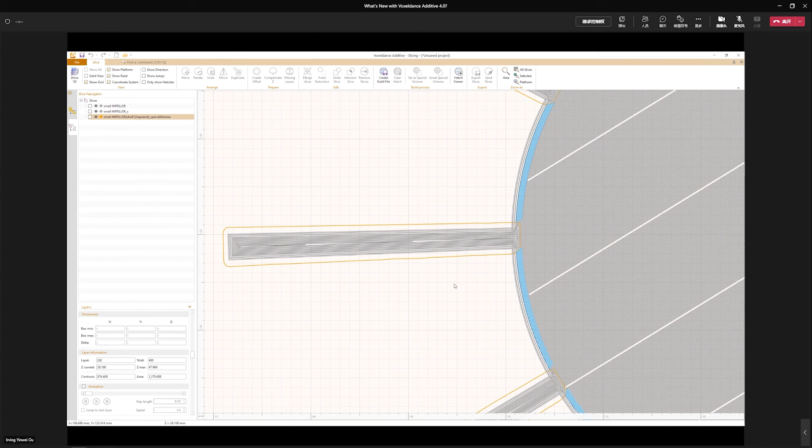Let's scroll up until we can check the slices of vanes. The area within this orange circle is the special volume area. Now you can see the majority of the part is using stripe fill, while the areas that fall in special volume are using offset fill. Alright, that's all for today's demonstration on Voxeldance Additive 4.0.